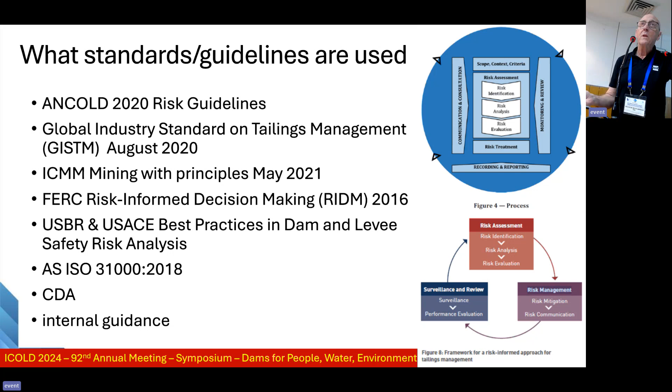And I said to a couple of guys recently, do you want to do a PhD? Do a PhD on piping of liquefied materials through cracks in a TSF. See if you can actually get it to work. Nobody's done that, as far as I'm aware, of the actual liquefied tailings.

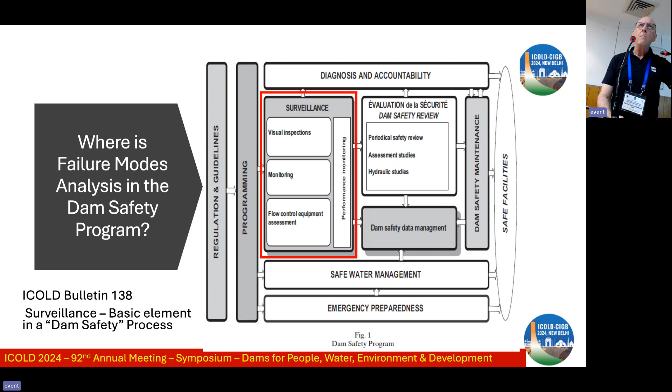So we've seen that figure there, which is basically the surveillance from Bulletin 138. Where do we fit in? Well, you can see it there with surveillance. Obviously, you've got your monitoring and your visual inspections, which we've talked about. I'm not going to go through that. So really, according to B138, it's the cornerstone. Maybe it was Kaya said that. It's really important in terms of the monitoring with instruments, which is what we're going to be talking about.

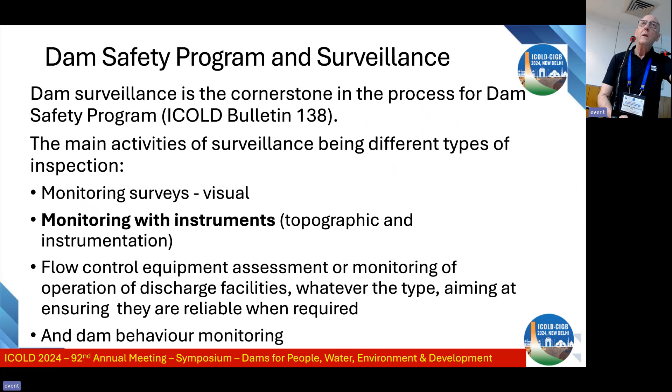But as Kaya said, visual and Manuel as well, visual is super critical. Don't ever forget visual as being a tool, as being an actual piece of equipment. Your eyes are better than many equipment. So why monitor? Kaya said that we can potentially cite failure modes, damage, changes, and design intent.

I'm going to go through a bit of philosophical mumbo jumbo now, okay? So be careful now. When we talk about inductive and deductive reasoning, who understands that? Can you put your hands up if you understand that? Who understands deductive and inductive reasoning? Thank you. I'm in the same boat.

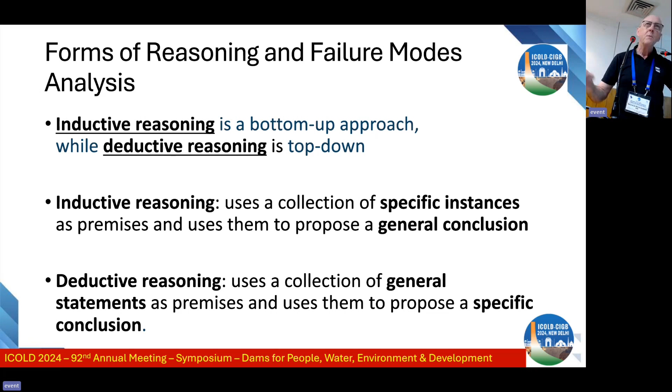So inductive reasoning uses a whole bunch of specific instances and uses them to get a general conclusion. Whereas deductive, Sherlock Holmes was a deductive. He deduced things, right? As a man who would try and find out who committed a crime. But it takes general statements and premises and uses them to propose a specific conclusion. If you don't understand that, don't worry.

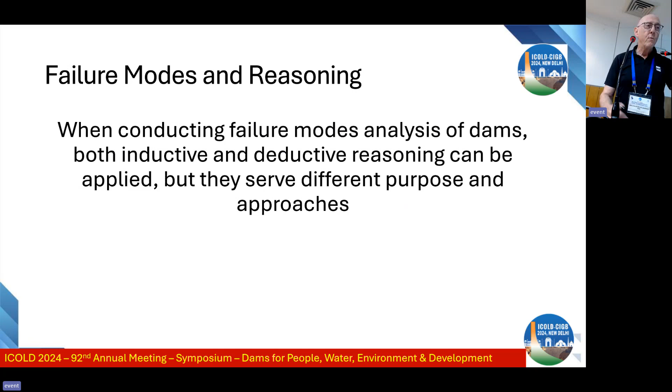So when we conduct a failure modes analysis, we can use both inductive and deductive reasoning. You probably do it without realizing what you're doing, by the way. So this is deductive. You start with general principles.

You apply to specific cases. For example, there's a general principle: structural weakness can lead to dam failure. That's a principle, right? So a specific case, you're inspecting a dam for known structural weaknesses and you find cracks, material degradation. Your conclusion: if these weaknesses are found, they are identified as potential failure modes. You've deduced this is a problem, therefore something's going to happen, right?

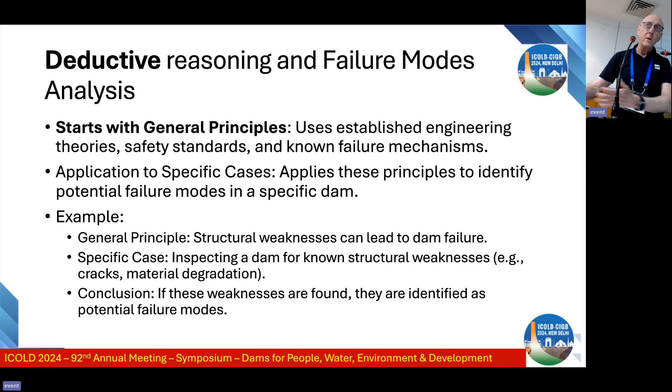That's what you've deduced. So in the failure modes analysis, you start with the unwanted event down here and you move upwards to lead to uncontrolled release of the tailings storage facilities. You'll see some diagrams coming up shortly, but you've obviously got to understand the dam components, their functions. Function is a critical part of the FMEA, both the system and the subsystem.

So in other words, what is the function of a sand filter? Somebody tell me, what's the function of a sand filter? Anybody? It's for piping. What is it? It's actually for seepage control and for piping control, right? That's the functions of a filter in a dam. So you have to understand the function so you can define a failure mode. How does that fail in what it's supposed to do? And what does that mean in terms of the end result, right? And they're obviously complex. The more detailed your system is, the more complex things become.

Inductive reasoning, which is what most people here probably do. Who does event tree analysis here? Anybody? When you're working out this happens, and this happens, and this happens, and off you go. That's inductive reasoning, right? You're actually starting with a specific observation. I've got an earthquake. I've got a flood. I've got a wind, something. What happens next? So you've gathered that data and understanding from a whole lot of examples, and you can start to reason what's going to happen next. That's what inductive reasoning is.

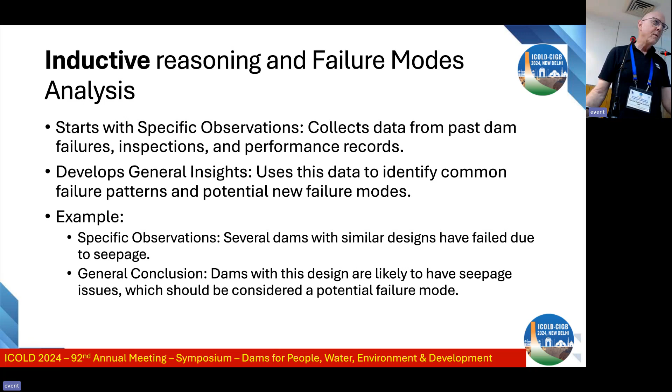So PFMA, now this is where there's an argument between the Canadian Dam Association, ICOLD, and the rest of the world, basically. They don't think that PFMA is that good, whereas the method that's in ICOLD and in CDA that's being pushed forward now is the way to go. And they are very good, I must say that, all right? And they have different purposes. But the inductive method relies on group brainstorming, and Andy called it brain sailing when he presented this. Part of this has come from his presentations to CDA.

And it starts with a hazard, your initiating event, ending in the unwanted event, a failure. So what might happen if a dam experiences a large earthquake, which is a hazard, for example? What happens next? And you brainstorm that. And I know when we were doing the Oroville Dam incident, not dam failure, incident, they spent a huge amount of time working on failure modes. That was seriously 2 weeks or something, with David Bowles and other brainiacs in there.

And I thought, man, my brain would be fried if I went for 2 weeks. 1 day is enough. Thank you very much.

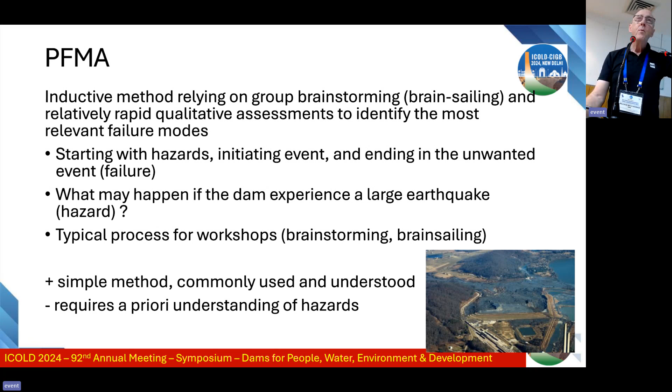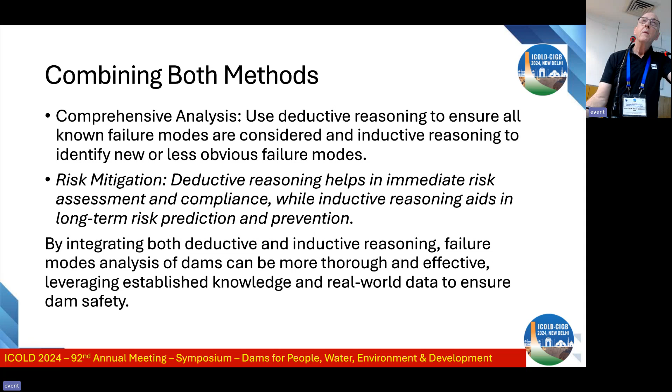Right. But it's a serious amount of brainstorming. It's simple. It's commonly used. You need prior understanding of the hazards to understand what's going on. But you can combine both, so a comprehensive analysis using deductive and inductive reasoning. So while there's this conflict between different parties, there's no reason why they can't both be used. They are very useful in different ways. Winston Churchill said, true genius resides in the capacity for evaluation of uncertain, hazardous, and conflicting information, which is what we're trying to do.

So here's some failure mode definitions from ICOLD and CDA. There is a subtle difference in CDA. A failure mode is the state or condition or loss of function or deviation from intended state, whereas the other ones say a way a failure can occur.

So it's how does this thing occur? Whereas the other one's a functional thing, CDA, which is not quite the same as ANCOLD. And ICOLD is similar in the tailings dam safety. So it does say that a term failure means loss of function, ability for it to actually perform properly.

So when you're doing a failure modes analysis, you've got to look at all of your stuff in your dam and think, what's the function of this thing and how will that function fail? If it fails, what happens next? You get me? So here's the CDA approach, and BC Hydro, by the way. They have only two failure modes. Dam fails by overtopping. Dam fails through loss of strength. That's what they call a top event. This is overarching everything, right?

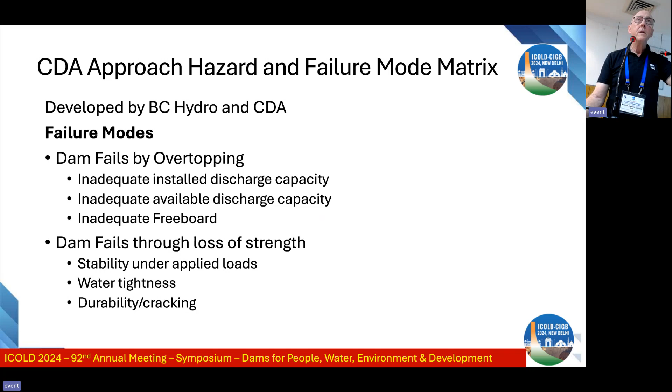But then the dam fails by overtopping. It's because they haven't got enough discharge capacity or available discharge capacity, installed or available, and inadequate freeboard. Then through loss of strength, there's stability, water tightness, and durability cracking. That is it. It's very simple, but we'll get into more detail on that one there.

So this is an important definition on the bottom there. The failure mechanism, the process that manifests itself in an undesirable outcome. So you start with the initiator and you end with system failure, the top level system failure. And I'll show you what that looks like.

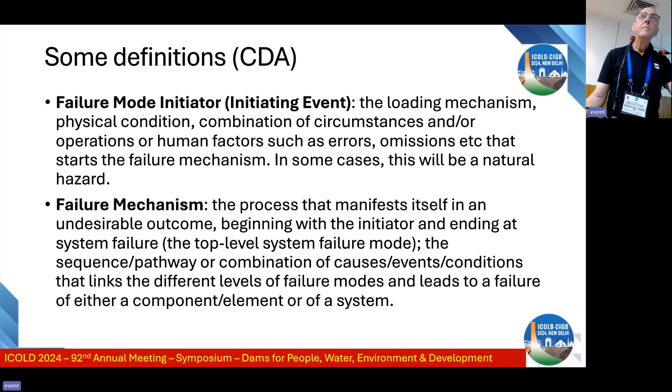So in the FMA methodology, you describe your system really clearly, you understand the function of everything in your system. The system might be a dam or dams or spillway or outlet works or whatever it is. You've got to be able to define that clearly so you can actually work out what the functions and the failures might be. They say create a block diagram. I prefer a functional diagram. What's the function of this thing?

I mean, typically you guys would probably draw, here's my dam, here's my outlet works, here's my filters, here's all this stuff. That's a diagram of the dam, right? So then what's the function of each one of those things inside the dam is useful. And you list them and their functions, you identify the failure modes, the manner in which a component could fail.

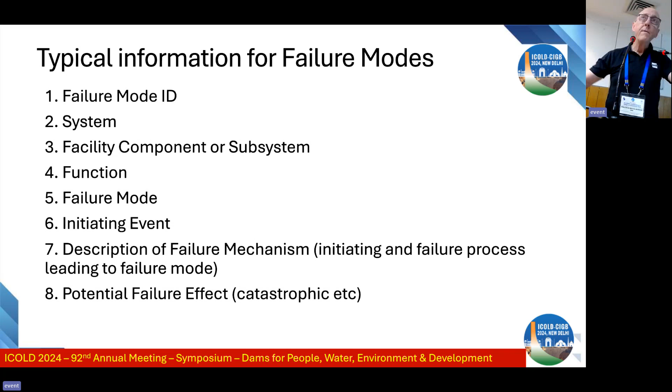And they've developed what's called the HFMM, which is, we'll come to, hazard failure matrix. And it assists you and describes the effects, and then the likely causes, and you get your actions from that. That is actually very similar to the inductive reasoning, which we normally do with event trees. So this is what information you need to get. Failure mode ID, what's the system, what's the component, the function, the failure mode, initiating event, describe the failure mechanism, and then what's the failure effect, is it catastrophic.

So this is the typical failure mode mechanism example. If you look on the left-hand side there, you'll see you've got an initiating event. I think it's a spanner dropping on a gauge which fails, and then it leads into the next failure mode, next failure mode, next failure mode, and eventually you get downstream flooding when the earth dam overtops because something's failed and caused a whole lot of things.

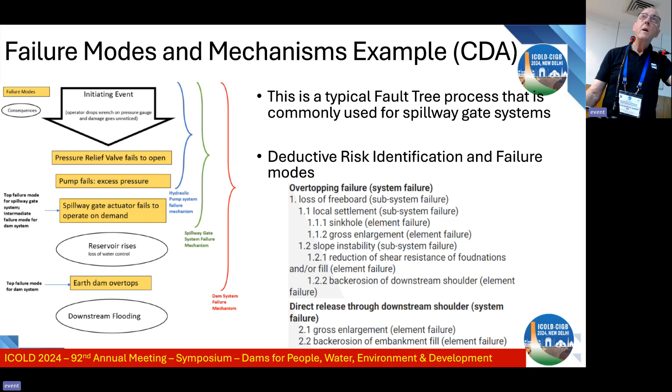You know the Swiss cheese theory that you've got to have everything lining up before everything goes bad? Well, it's kind of like this, where you say, the pressure relief doesn't work, pump fails, nobody fixes it up, the spillway doesn't work, reservoir rises, and the dam overtops. Bang, bang, bang, going from the bottom up. And there's a deductive reasoning risk on the right-hand side there.

That is a picture. So if you look at this diagram, you see at the bottom there, you've got progressive saturation, increased pore pressure, loss of foundation shear resistance, loss of shear resistance. So it could be an OR. This is a fault tree, by the way, as opposed to an event tree. Everybody's used to these events happening and going everywhere. This is a fault tree.

So you move from the bottom up. All these things down here would be things that are not good. Then you work your way up as to what that means. And then you get slope instability, overtopping, loss of freeboard, and dam failure. That's a top event. And all of these things down here lead to that. Right? Does that make sense? Okay, simple, isn't it?

Not really. When you do this, you must be careful. I've worked with fault tree analysis, and you've got to have a clear description. What is this top event here? That defines everything that happens underneath here. So you start from there and you move downwards.

Overtopping by loss of freeboard. How does that happen? Oh, I've got local settlement or I've got slope instability. How does local settlement occur? Oh, I have a sinkhole or I have gross enlargement. You would need to then say, well, how does a sinkhole happen? Oh, I go down here. You know what I mean? You're progressing downward until you come to the bottom down there where you say that is what's called an event. That's an initiating event that moves upwards to your failure, right?

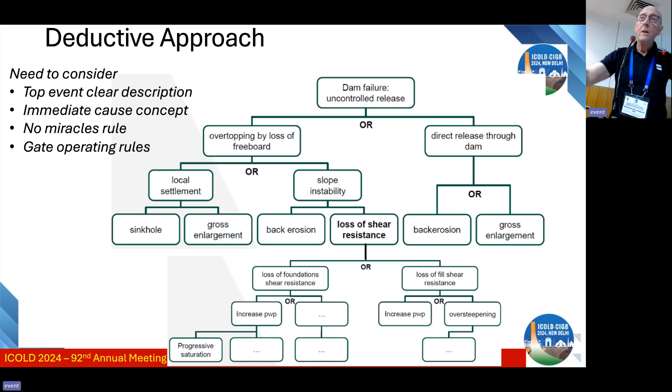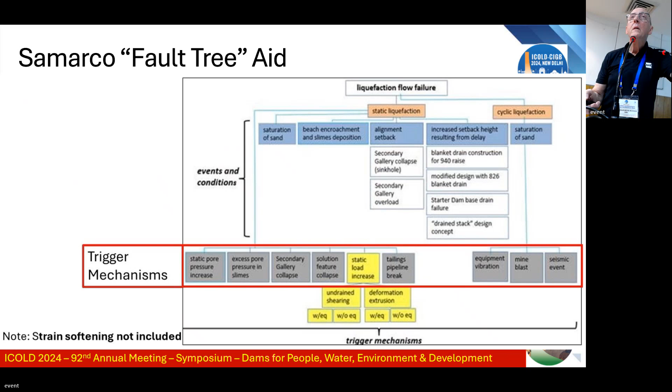So functional diagrams, I think, are really useful, and it clearly shows your components. Here's one, for example. You can see that's your dam. You can see how they've actually said, for example, that is a drop inlet spillway there. And what is its function? For flood release, right? With air supply to prevent negative pressures.

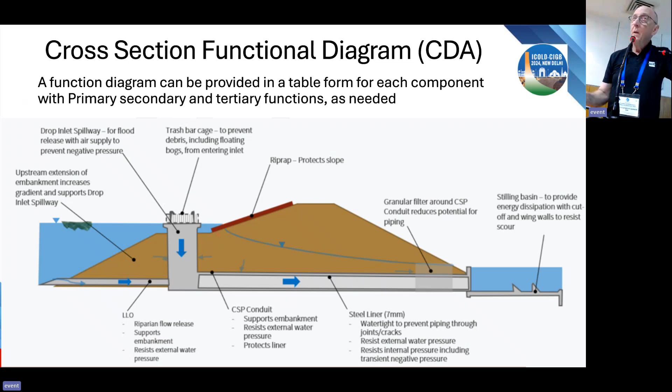Now, you could go deeper into that. You say, well, how's the air being supplied? Could that be at fault? If the air is not supplied, I get cavitation. If cavitation happens, then I get damage. If damage happens, I can fail the dam. Does that make sense? Going down, down, down, right? And this is just a tabulated thing for all those different components in the dam.

So functional diagrams, there's also elemental, functional, dynamic, operational, analytic. I'm not going through these. These are all in the Canadian Dam Association bulletin they produced. But some of the USBR say, and I think it's quite correct, if you cannot draw the failure mode, then it's not credible. How's that one, eh? Is that putting my neck on the block, right?

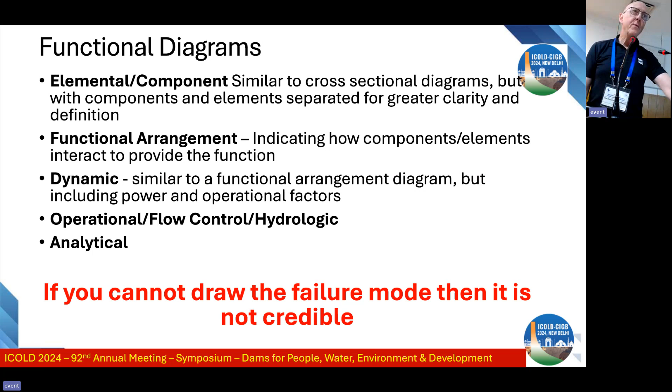If you cannot envisage and even draw this thing and say, this is going to happen, that's what's going to happen, then how is it going to happen? Is it not credible? FERC have their own guidelines for that too, but we'll come to that. And so does GISTM, which we'll come to just now. So that's an analytical functional diagram. Also, we do those as a matter of course. They're obvious, right? When you're trying to analyze your dam.

This is a functional information table where you have your failure mode, overtopping; a component, sluiceway; initiating event, earthquake. What's the failure mechanism that's happening to give you that failure mode for overtopping? To me, that's almost the same as what I would do with an event tree. The seismic event causes it. So you can see the failure mechanism clearly spelled out there. What gets back to there? So you're kind of going backwards there. Anyway, that's what they do as well.

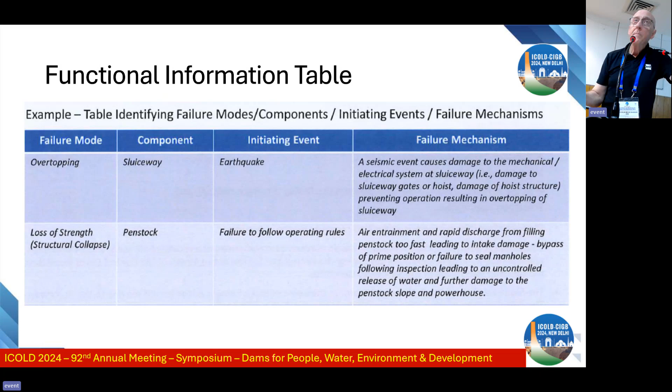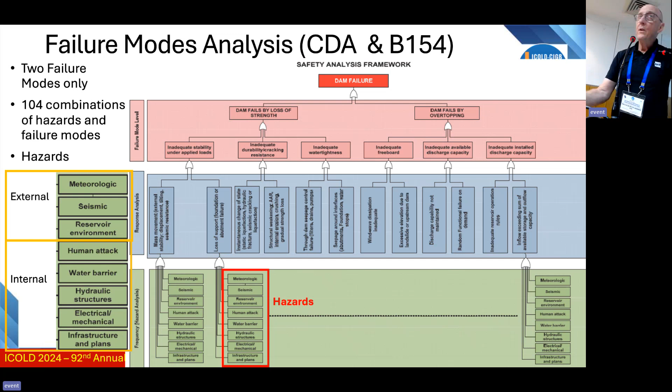But that is in the ICOLD bulletin 154 and the Canadian Dam Association. That is all a fault tree. See that there? The dam failure because of those two failure modes. Two failure modes only, 104 combinations of hazards and failure modes. Right? So you take that nice pretty picture and you convert it into a table like that. And you look at that table, you say, my goodness, that's a wonderful table.

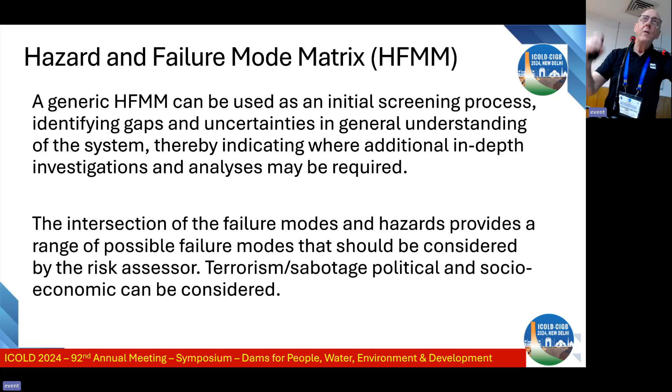But you have to go through every single one of those blocks in this approach to figure out which of these failure modes could happen. You can't read any of it, I know that, but that's okay. It's their generic hazard and failure mode matrix. It's a good matrix, but they say that's not the be all and end all. When you've done the failure modes evaluation with that, every time you got one of these, there's a question to answer. You see a little red thing up there in Excel, you have to answer the question. Is this applicable? Could this happen? And it's a good way of prompting you to think, gee, could it happen?

I don't know. Whereas when you're doing the inductive method, the PFMA, you don't have that table. You start from, this is what I've got in my dam, this is how it could fail, and you work through that way. So as a basis for asking questions, it's really good.

That's just a difference: on the right-hand side is the failure modes analysis approach the CDA is proposing. On the left-hand side is the PFMA approach, right? So you can see seepage through the varved clay layer, and you've got uncontrolled release over here. There's uncontrolled backward erosion there. Initiating event is seepage into a sand lens, and these are different failures of integrity. Very similar to that. So I do struggle to understand why the CDA gets so twitchy with the PFMA. But anyway,

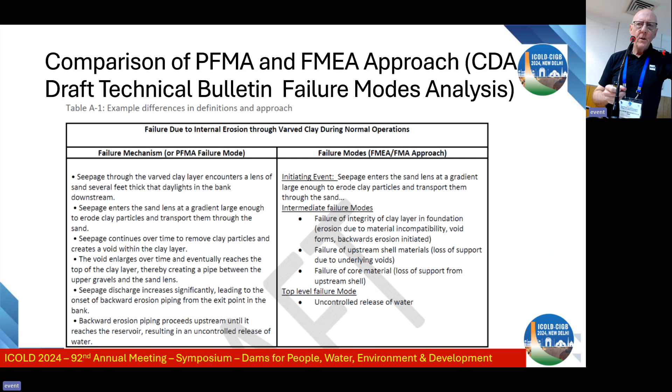that's what they say, that this is much better in terms of understanding. I really like the functional diagrams, the matrix, and even drawing up a fault tree type of approach. They can be very hard though at times. So Morgenstern in 2018 introduced the RPN, where he says you've got the likelihood, severity, and detection. Can you detect this thing? To come up with a risk priority number. And you use that when you're implementing mitigation measures.

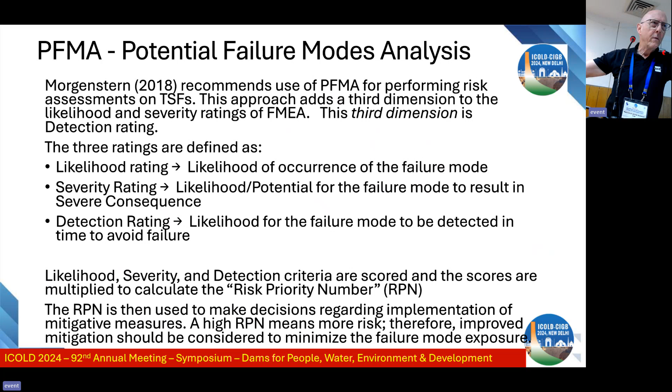Then we come to FMEA, and it's an inductive method. We clearly say inductive, right? Particular faults are postulated, and the analysis reveals the full range of effects. What happened next, right? And it can be extended to FMECA, which is a criticality analysis similar to the RPN, but not quite the same.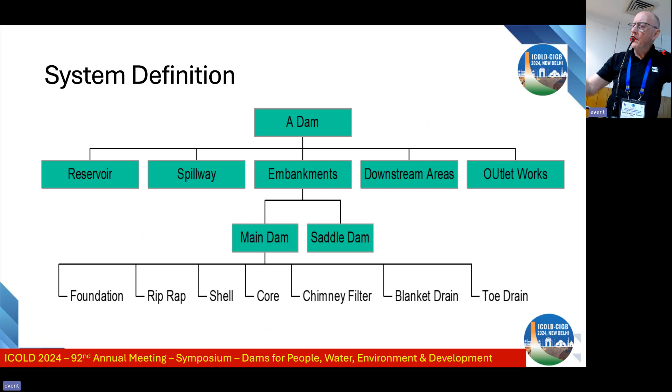And then, given the component number, what's its primary and other functions? We clearly say in ANCOLD, you need to define what is its primary and other functions, and then you can identify your failure modes associated with those things not working properly. And you look at your local and end effect, and can you detect it? And that's important. Can you detect it? Can you mitigate it? And what are the consequences?

And detection is really critical from the point of view of your TARP. Right? If you can't detect it, you have no chance of warning people downstream. But you need to have ways of detecting different failure modes. So what is the best way of actually detecting that this thing is going to happen? And what can you do about it?

That is a typical initiating event spreadsheet that we use. We got all of these events down here. Some of them are crazy. For example, ice in Australia.

Are you kidding me? No, we do have ice, but not much, you know. Norway, you've got lots of ice, I'm sure. But in India, I don't think you've got much ice here either. But anyway, so north, yeah, of course you would. There are lots up there, nice and cool.

Okay. So, and there are things like termites. Termites are a hazard in your dam. I've seen a termite failure of a dam starting, and my boss put his finger in the hole to stop it. Right? He literally put his hand on top to try and stop this piping occurring. Right? So there are a lot of hazards you can have there, initiating events.

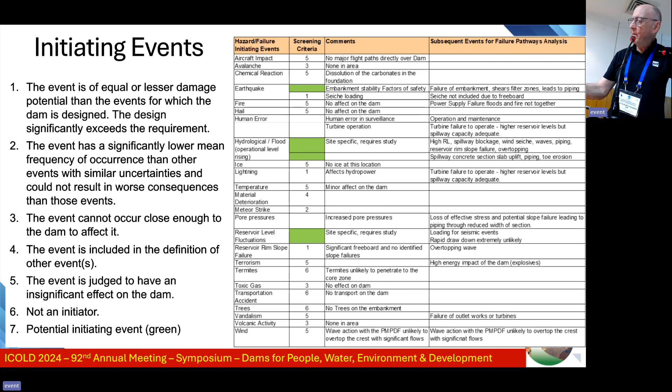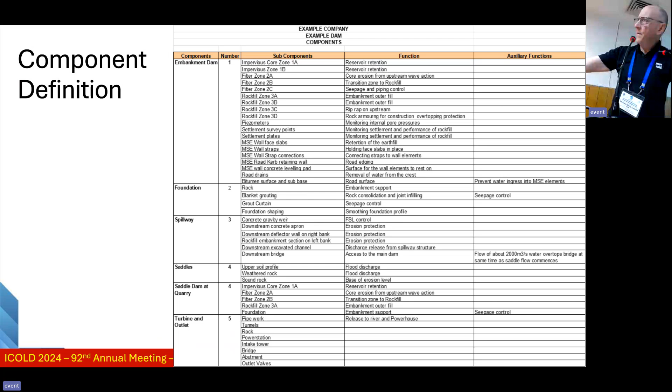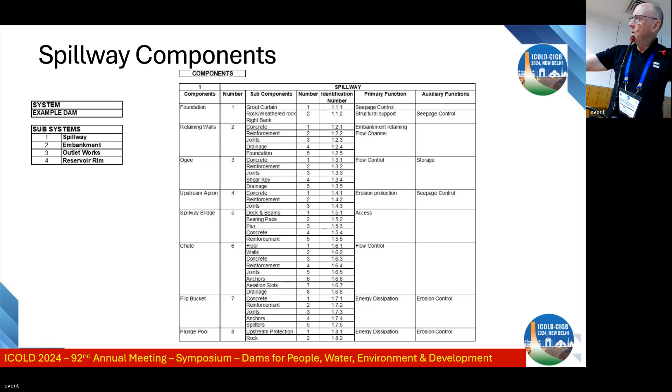Then the next part is your components. You can see there are a whole bunch of components in a dam. Right, there they are. There's the function, and there would be an auxiliary function over here if there are other functions. So component definition is really critical. Then that's the spillway components, for example, and you can see there are a few with auxiliary functions as well. And then you come to the typical failure modes analysis, and I'm going to flip over this one because there's a much better one with the USBR and Army Corps of Engineers definition of failure modes. So here we go.

They clearly say you've got to describe your failure mode properly. For example, if you say piping from the embankment into the foundation, that's a failure mode, right? I mean, smiling at me thinking, oh, dummy, of course, yeah. But that's a simple definition, isn't it? What else do you need? Well, you need to know exactly how that failure mode is actually going to occur, which is why you've got this super long definition or discussion over here as to how that failure mode will occur.

And when you do your exercise, you better be sure that you can describe how your failure modes are going to occur so that you can monitor them or you can control them somehow, right? If I know that I've got a failure mode that's going to be from piping or whatever it might be, it's going to get bigger and bigger, can I monitor that? Piping is a bit of a pain, actually, because it's not easy to monitor piping.

I had an incident on a dam, and I'll show you just now. The pore pressure on a piezometer just went up, stopped, went up, stopped, went up, until I blew the whistle. I said, something's happening. And we found a hole in the dam. Water was squirting in there and pressurizing 200 meters away. Right? And eventually we found the hole, we fixed it. But the piezometer was telling me what was going on. I thought, wow, that's amazing. I've never seen that before like that. It was just so good. Actually, terrible, but that was good, you know.

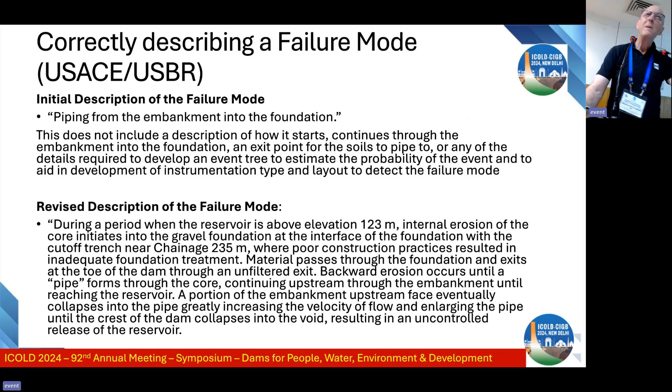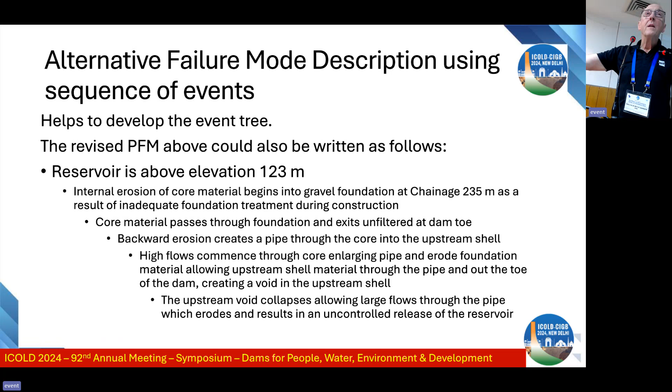That's another way of actually describing that same event there, down the bottom there, with an event tree process, right? Just showing how it can occur, which is much easier to equate or understand, basically, as far as I go.

Can you clearly be sure I don't have to monitor that failure mode? Maybe. That's your decision, right? You're the engineer. You've got to figure out, can I not monitor this failure mode?

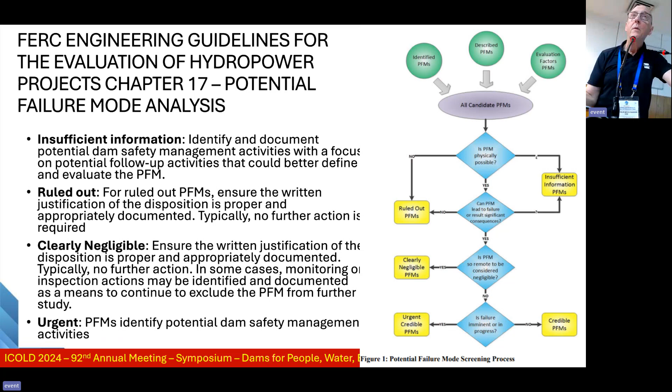So then you've got this whole thing of credible failure modes. Are they technically feasible? I do like this, actually, in a way. It's kind of an interesting definition. I thought, yeah, crazy, man, you've got to have everything credible. But no, technically feasible failure mechanisms. That's the kind of thing, can you draw this thing, right? That's the way I look at it.

And then the materials present in the foundation, the properties of the materials, the configuration of the structure, the drainage conditions. You're taking account of all those things when you're evaluating the technical feasibility. In other words, if I haven't got liquefiable material, then liquefaction is not an issue, right? It's disappeared. So that's why you change the dam design from an upstream raise to a downstream raise. Simple, problem gone. Eliminate the risk. I don't have to monitor that anymore.

I still have to monitor the dam zone. But they do result in different failure scenarios. So you have piping or flood overtopping or seismic liquefaction. So credible failure modes do vary with time. You know that. So we just need to be aware of that and be sure that we have...

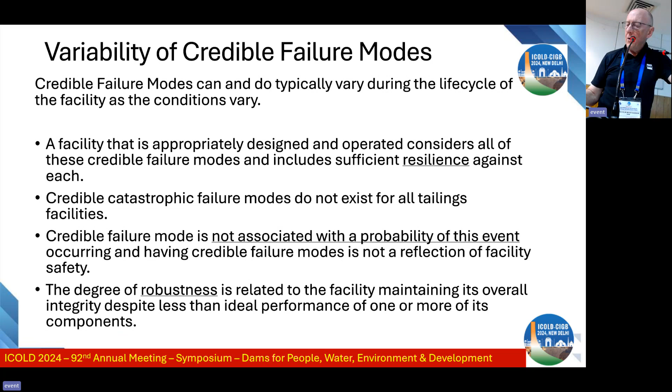And there's two words they use here which are really important. One is robust, and another one is not there anymore. It was there. Resilient. So they need to be resilient and robust. Resilient, it can handle changes, and robust as well. There's a definition of those, but that's what they have got.

And then you've got ICOLD. These are in the ICOLD bulletin.

How much time have we got? About 5 minutes? Yep. Okay. Well, I got actually zero.

That's all right. Okay. I'm not going to go through these in detail, but this is directly out of ICOLD, out of Bulletin 194. All I've done is I've gone through and said, right, these are instability due to foundation failure. You can see all of the reasons why you might have instability in the foundation, right? There's pore pressure generation, artesian pore pressure, liquefaction, incorrect seismic hazard, erosion of the toe, or even excavation of the toe. We've had that before, haven't we, Edgar? Or there's undetected weak materials. Those are all reasons why it might happen, right?

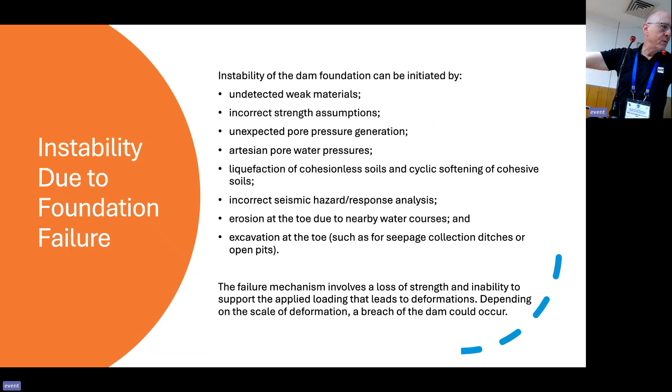So what are you going to do about it for your monitoring? Or there could be instability of the dam slope. So all of those reasons might be there as to why that can happen. And then the next one, that's how you can monitor it. For example, if you put piezometers in, you can monitor for seepage or blowout or heave, where you're seeing the change of pressure.

Where do you put them? In the foundation, downstream, below the lower permeability layers. Those are the kind of things you've got to think about when you're looking at the failure modes. What method is there to actually monitor it, and where do you put it? We know that, right? That's what your exercise is going to be about. But first, you've got to define the failure modes.

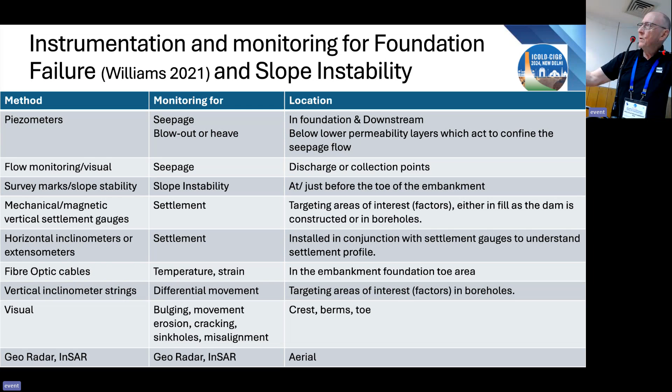What about overtopping? We talked about freeboard. There's your freeboard up there, a little bit of freeboard. When your flood comes up and you've got to your maximum flood level, the spillway there, you've got a bit of dry freeboard there, and then it starts to overtop. And your tailings are deposited nicely on the upstream face there. But can it be initiated by a whole bunch of things? Yes. Large floods, wind, waves, sabotage.

We haven't talked about sabotage or vandalism or terrorism. It could happen, right? How do you put an annual probability there? I have no idea. But you still can put it down and say, the political climate's really bad. What do I need to do about this in my dams, wherever they might be? They're not soft targets. It's hard to destroy a dam, very hard.

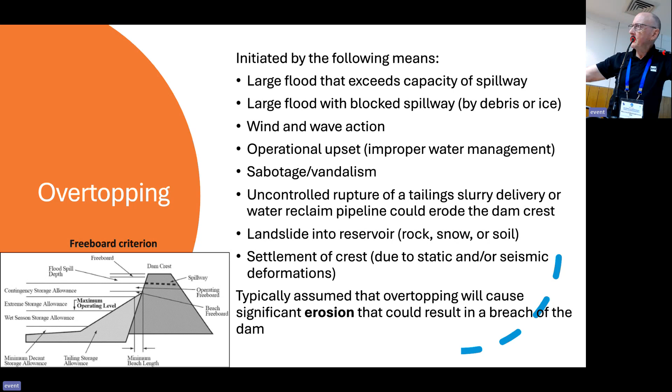So what about overtopping? How can you instrument overtopping? You can check where your decant pond is. You can check the status of leak detection systems. Secondary containment. What about automatic flow measurement and fault alarms on the pumping pipeline? All those things you can monitor to make sure that everything's going all right. If they're not working, suddenly the water level goes up and you're in trouble. That's just a pretty chart showing erosion classification for different depths and that sort of thing.

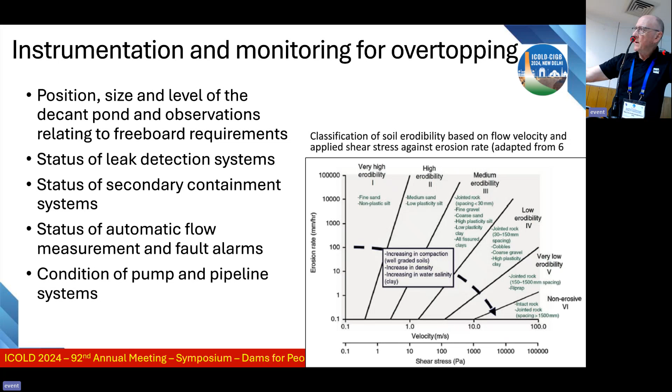And in piping, as I said, the only time you really get piping in tailings facilities, as far as I'm concerned, is when the water level goes above the tailings level, and you've got that water against the embankment as opposed to tailings. So how can you monitor it? You can look at trends, rainfall, linear increasing, sudden changes. That's the one I was talking about there.

You see my nice piezometer there, that orange thing? Going up nicely. I thought, oh, good, it's going to, no, it didn't, it went up. And now it's going to be fine, isn't it? No, it didn't, it went up again. Oh, now it's going to be fine. I triggered it there. I said, that's it. I've had enough of this. I need to figure out what's going on. And I found out the problem.

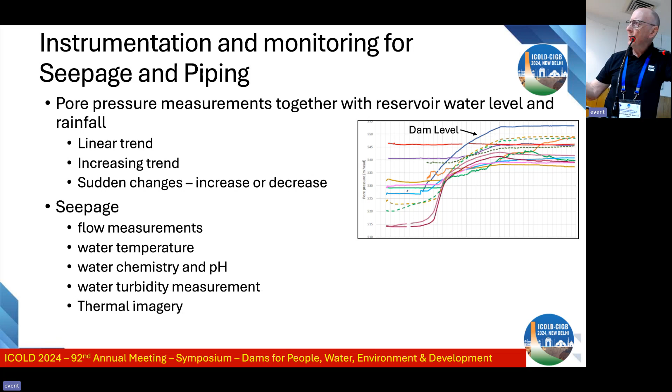So what about seepage? Your chemistry, we're talking about dirty water stuff. So what about measuring that in terms of, is it increasing? Are they changing? Do I have clear water now? I've got dirty water. What's going on in terms of the actual water that's coming out? And I guess visual. Remember I said visual is important. So where is it green or not green? Where is it dead or not dead? Seepage will kill as well as give life, right? Depending on what the chemicals are in the water.

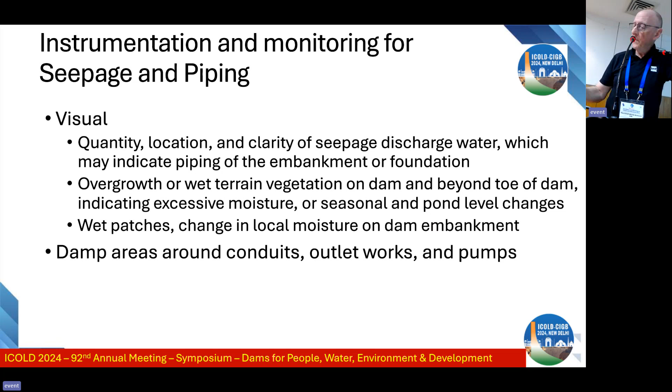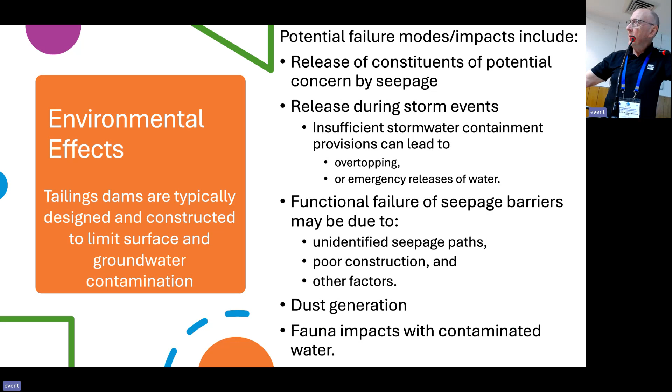And environmental effects. We talked a little bit about it, what you're releasing into the environment during storms or seepage barriers. So your seepage barrier is the cut-off trench, for example, or the foundation grouting or something to stop the seepage. And if that fails, well, off you go. Can you monitor that? Yes, of course you can. And there's your instruments, again, visual and seepage monitoring.

And that is not the end. Somewhere. This thing died, by the way. It's just dead. That's done with that. That's it. Thank you. Oh, no questions, huh? Oh, come back.

Well, I think we have got a bit of time later on the end for our exercise, but we haven't actually got the sheets for the exercise yet. So I think we've probably got a few more minutes. We could take up a couple of questions for Malcolm. So anyone got any questions for Malcolm? One? No, I'm not answering that one.

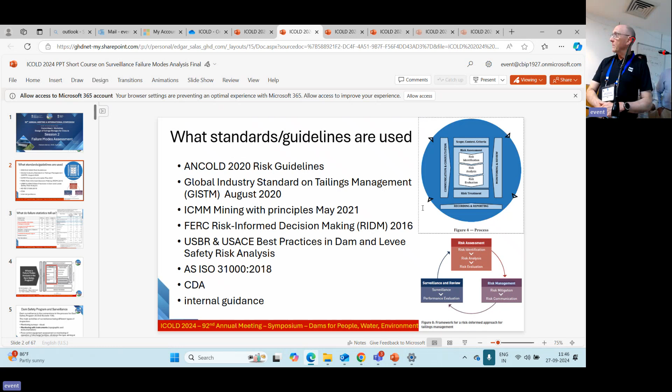When we assess probabilities, we always use historical data to kind of benchmark and see where we are. But then with both fault trees and event trees, we can really account for the human error and break it down and then use expert judgment. So you can always analyze, is there proper training within this organization? How is the governance? So do we have procedures? Do we have a good regulation backing up the operations in this area, in this country, and for this dam owner? Do we have all the procedures?

Do we have the O&M, operation and maintenance manuals? Do we have the emergency action plans? So all of that really informs how we assess the human error. And we should go for it. And that's included when we reduce risk as low as reasonably practicable. That's the GISTM term, right? And in dams, which has been around before GISTM came along, we have to include that sort of thing. Is my operational maintenance deficient in that area? I need to fix it. It's a small thing, but I need to fix it, whatever it might be.

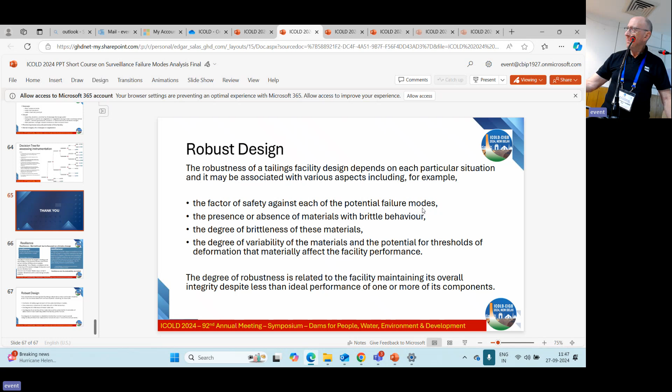Yeah, exactly. It's easier said than done. You agree? And we are humans. We cannot predict each and every error that can happen in the next 10 years. Sure. It can be something as fine as the operation hiring somebody who maybe is younger, and there's pressure from the management, and that person makes the wrong decision. We can't predict that.

Or, sure, we look back at Oroville. I mean, Oroville had all the expertise in the world, had all the money in the world, had amazing engineering, and one little thing slipped off, right? So even in a very robust organization, you can still have these things. So yeah, no, I don't disagree with you. It's just easier said than done, and it's still something we work on.

And my point is, independent reviews, dam safety reviews, review boards, etc., are the ones that are having multiple layers of independent perspective and opinion on what's happening. That could help mitigate some of the issues. And I think going along with that, I didn't put a slide in here, but one of the biggest issues with all of these techniques is biases.

Everybody has a bias. I think cheese is green, you think it's orange. Well, I don't care what color it is, it's cheese. And everybody has, well, I'm better than you. And come on, who's better than who? I mean, really, we've got to be so careful of professional biases when we do these things.

Somebody will stand up and he's the bee's knees, he knows everything, and everybody else just says, oh yeah, okay, fine. And meanwhile, this person over here who knows very little might say, but hang on. So you really got to be careful of biases when you're doing all of this stuff. It's dangerous to not. And I've just brought that back up again because when you deal with these things at the bottom, you try and figure out what's the controlling one.

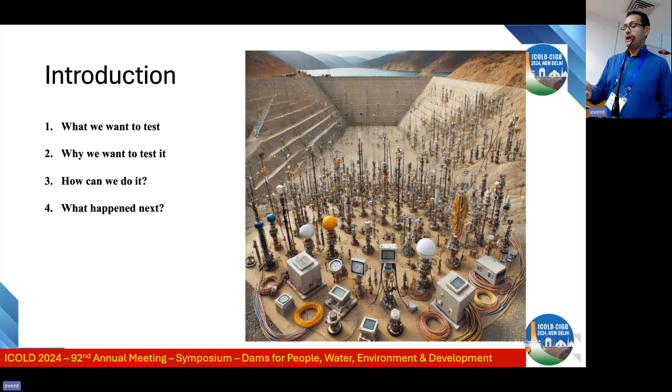This is going through different dams and different components, trying to answer the question of what we want to test. This is a typical or traditional downstream dam. We see the components: a core, typically an impermeable clay core, a cutoff trench just to stop the water going through. We have the foundation materials, tailings, and a shell that could be rock fill or general fill. We have some filters to deal with a failure mode because one of the components could fail, and a drain, how we're going to collect the water and how much water we're going to get through seepage.

Then we have variations in tailings dams. We have a centerline, with similar components, but in some of these configurations the tailings might be more critical. The foundation might be more critical. The rock fill might be more critical. The filters might be more critical. And that is part of the journey of working out what is critical based on your failure mode.

Then we have a traditional upstream construction. You can infer from here, hold on a second, this is sitting on tailings. Then are the tailings the critical element to test here? Is it the rock fill? Is it the phreatic level? Is it the water inside?

Then we go with a traditional downstream construction. And it might be that in this one, well, I don't really care about the tailings. Then the tailings are not that critical in my case. The foundation might be, the rock fill might be. Then just basically trying to answer that question: what is it we want to test? And typically the answer is what is important to you to test.

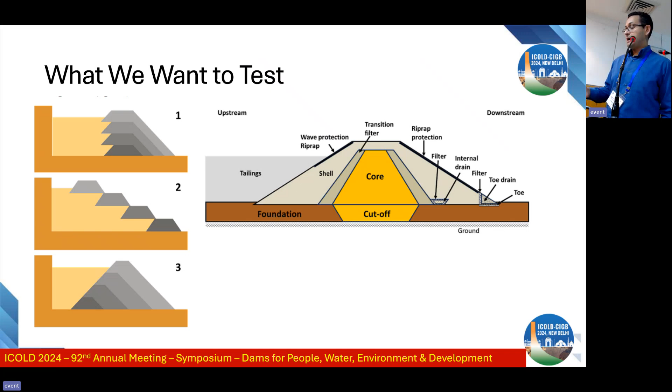Then the tailings, if we have a configuration like this, can the tailings liquefy? I have all my dam basically sitting now on tailings that potentially could liquefy. Are the tailings gonna go and disappear under a seismic event or start liquefaction? Or are they gonna actually deform nicely and happily over the next 30 years? That is, in my short summary, what you need to understand: what you want to test and why. Then I'm gonna start with something quite simple, but to me it is the key of everything that we do.

A tailings dam is a beast. I see it as a beast and it's alive. And when I say it's alive, this in here changes as you build the dam, as you add more weight to the dam, you add more water, you remove the water, that will change how this material looks on the inside. And this is exactly the same for the foundation, for the rock fill, for the tailings, for the filters; pretty much every single component follows these three rules.

If you add weight, the water is going to try to get out, the voids will disappear, then you have a material that potentially is more dense. If you're making that material more dense, are you making that material now brittle? Are you making that material problematic? In the opposite, if you remove weight, the material becomes looser; then are you creating a problem?

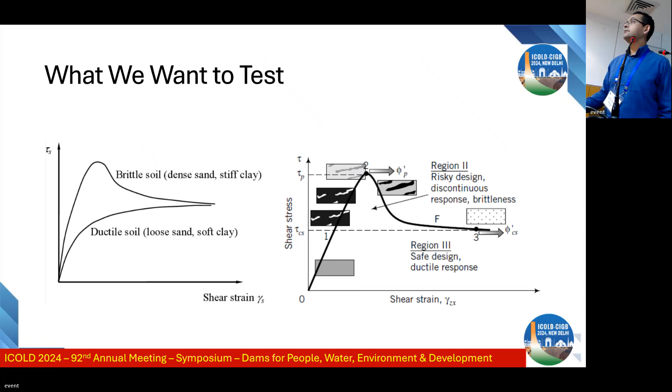Then why do we want to test it? I'm just going to go through simple points here. We want to design; we want to understand what we're going to design against or for. During construction, we want to predict how the material will behave. Operations is pretty much another phase of construction, but it's how the dam will behave as I'm operating it. And closure is how the facility is going to perform over the years after we close it.

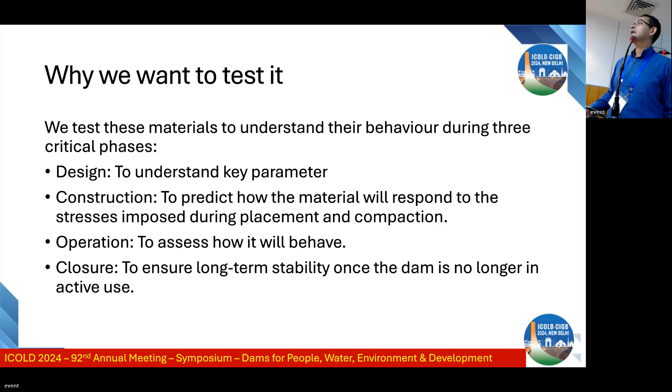Now, how we do it: basically we have two simple methods, and most of the time we have to use them in combination. We have in situ testing, where typically you go there, drill, take samples, and do in situ tests: CPTs, SPTs, shear vane. The other one is to go there, collect the sample the best that you can, and test it in the lab.

The problem with the first one is that we don't really understand what is going on in the ground, so we rely on correlations. We rely on: if we put a bar in the ground and hammer it, how does that compare to another bar in the ground that was done 30 years ago by a person somewhere else, and yeah, it makes sense, it's the same thing.

Or if we go to the lab, we collect a really small sample and try to mimic the conditions in the ground, which, remember, we don't really know anyway. So we're trying to assume the worst case scenario. Typically you need both.

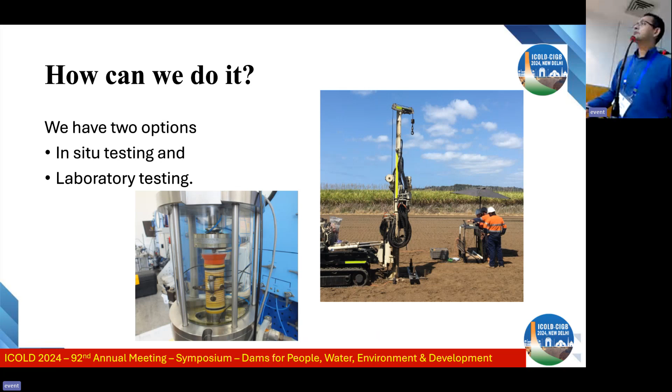I'm just going to go briefly through the most common ways to do it. In terms of in situ testing, we basically have SPTs. As I mentioned before, you go there, hammer the ground, count how many blows of the hammer you use, and basically try to work out a density.

Then, okay, my material is dense, is loose, and then you relate or try to link that density back to what I mentioned before: how many voids, how much water I might have, what sort of soil I have, and then you correlate that through those areas.

Now, something interesting about this testing, and I'm quite familiar with these scenarios. I don't know about in India, but in saprolites, really all residual soils, in Australia, New South Wales, we have that. You go there with this tool, start trying to hammer and get the rod down into the ground, and you can't, because the soil is that hard, because it's basically been going through leaching.

It's really hard, but guess what? The material is super brittle. Then it will break really fast, really quick. And you think that you are in really nice, hard soil, and you are not. Then that is where you need to complement that.

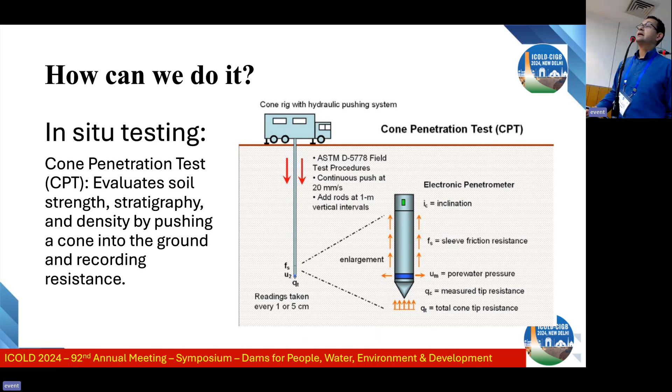Probably one of the most popular techniques in tailings dams is the CPT. It's quite similar to the other technique. This one goes as a bar, goes faster. It's slightly smaller. You measure the pore water pressure, and then you basically one more time use empirical correlations, trying to work out the soil conditions, the layering, where the phreatic level is, and so on, and the liquefaction potential as well.

Another simple or common tool is your shear vane, which is pretty much similar to the other techniques. You push it into the ground, you rotate this vane, and you're trying to basically correlate that to some sort of strength. Typically, you basically use this to determine undrained strength.

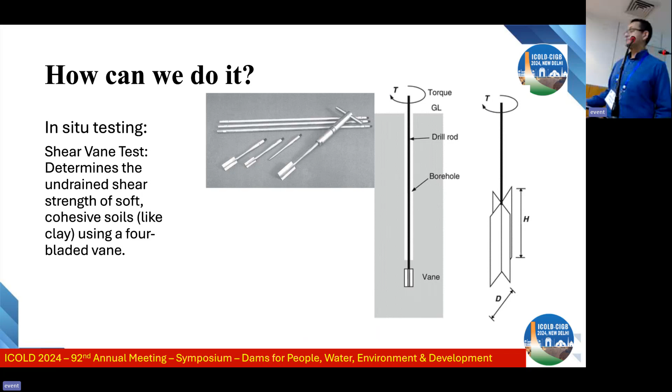You're trying to go either side, and then you can work out the permeability of that material and say, well, if I put all this weight and all this water, the permeability of that material is this much, and the water can go really fast through there, or it can go really slow, and then you basically put that in your design if it's critical.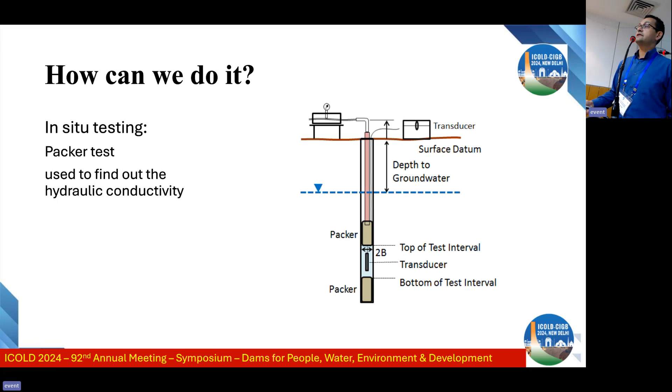The most common one of all of them is a triaxial test, where we're trying to mimic when we are loading the soil, or sometimes we pull the bars up, and this is the way we are basically pulling the soil, what we call extension. You can get drained values of the material. You can get consolidated undrained as well. Then you're trying to understand what happens when you load the materials, how they respond, how they compress, how the dry density will change.

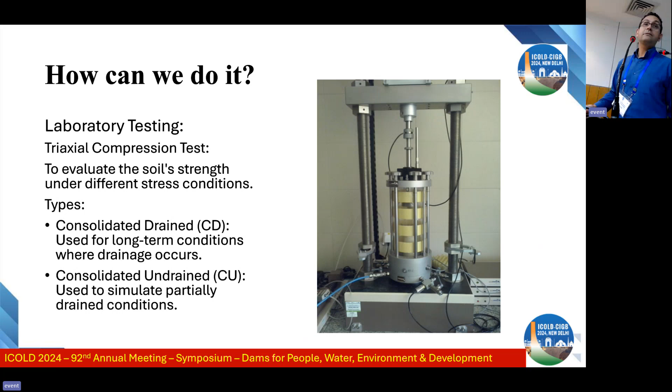The other one is not really as common, and this is just a variation of the other triaxial, and this is about cycling. You just go up and down, up and down, trying to mimic what an earthquake will do to the soil, how it will react. And there are some variations. These ones go up and down. We have other ones that go sideways, similar to the direct simple shear test.

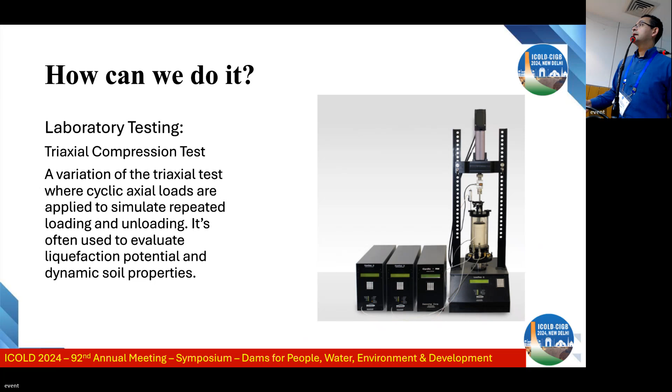Then what happens next? Now we went through, we collected all the samples. We determine, well, I want this material to look like this, and based on my lab results, I'm expecting to see the phreatic level stop here, go down, and disappear in the foundation. If that is the case, and I want to be sure that is the case, then during construction this is empty, so I might not put any instrument to look at that, but during operation I want an instrument there, because I want to be sure the permeability is what I assumed it would be. So during construction you put that instrument in here, because it's really important for your design to understand that permeability.

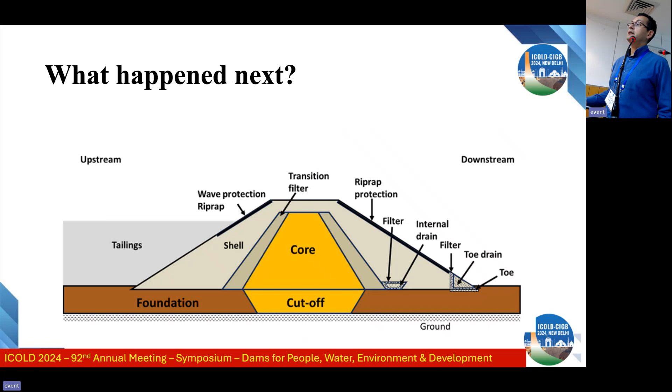Similar with your filters. Is my filter able to actually drain any water? If this failed and I'm wrong, if I want to know my filter is actually working, then you might introduce another one here. Similar with the piezometers. Then you start thinking, okay, how can I use this, and what am I going to use to design my instrumentation. The settlement: okay, I put the sample in a triaxial and I notice it settles this much. Then a similar thing should happen here, an oedometer test. That is basically how we need to link this.

Then you go to the design phase. You now understand the shear strength. You know what the material is going to look like. You know the permeability, and you know the compressibility of that material. That is the moment, at that design stage, when we add all the tools that we want to add. And the problem is, it's not common that we are able to go into a design phase.

Typically, we go to a dam that has been sitting there for years, where nobody has done the geotech, and nobody really understands the failure mode because the dam is quite old and you don't have the records. This is similar, it's still valid. You need to start looking for the right things. How you do that, back to what Malcolm was talking about, is your failure mode. You have an existing dam, you really want to understand what is critical, you do the testing and you work through that.

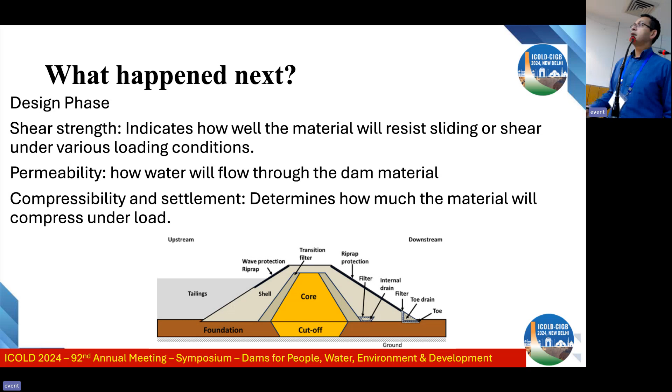During construction, some of the dams, it's more common probably in water dams, they fail typically when you start filling the dam. This also could happen in tailings. And as a way how you're building this, you want to understand what is critical for that construction phase. And even though the instrumentation that we use is the same, and what we are probably going to be looking or monitoring for is the same, because we're going to probably be looking for permeability in the clay core.

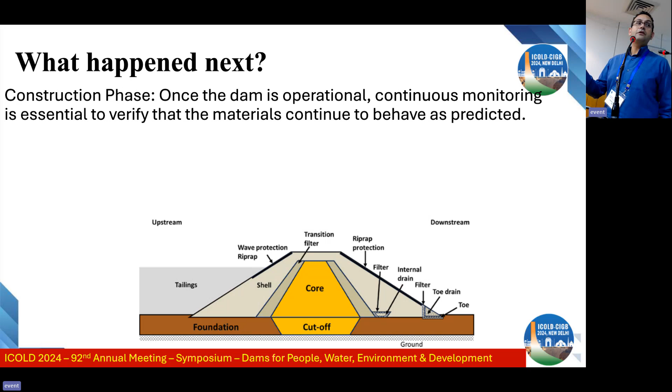Then one thing is permeability in the clay core during construction, during operations, during closure. Then it's a different value. And that is the reason why I say this is a beast that is alive, because it's always evolving. And it's evolving based on the way how you manage these dams.

During operation, it might be that you are looking more at what happened with the pressure, how I'm increasing the pressure because I'm putting all these tailings full of water in here, how the seepage is actually acting in here, ongoing consolidation, the material settling. Then what you are actually using is the same, but it depends on what part of the cycle you are. And that basically is the key.

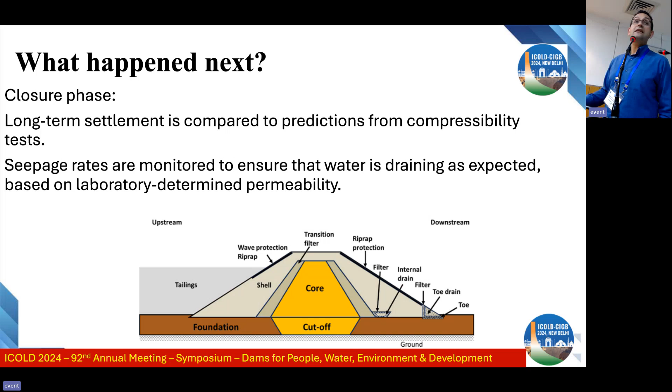Then we go for the final one, which is your closure. In closure, I'm expecting, well, the water will disappear, this will consolidate, everything's going to look nice and pretty. Then you need to be able to actually look at that as well. And by then you have different trigger levels, you have different criteria to assess. And basically that's it. I hope by trying to make it as simple as possible, just to make you think into how to use the data you collect in the field, and how you can use that to develop your failure modes and your monitoring.

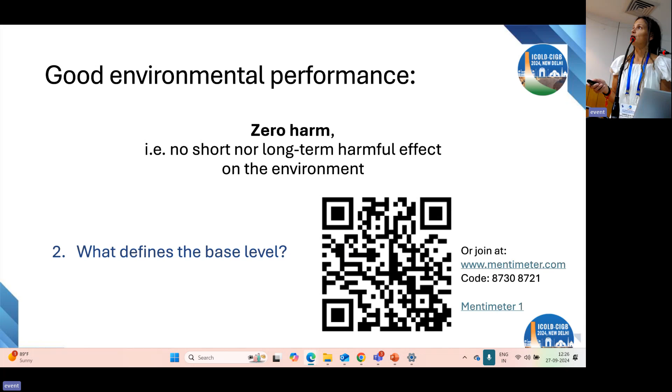So good environmental performance. My suggestion to define that is zero harm, that we have no short or long-term effects on the environment or harmful effects. And that brings a few questions. So that was a strange order. So I have these 4 questions. So if you use that QR code, or you can also log in on mentimeter.com with the code there.

I just need to get this. Do you get the question? So I need to activate it here. So it's activated? Yes. And now it would be very fancy if you could see on the screen whatever answers pop up, and that's my problem, because that I only have on my own computer. Yeah, I know. So when you receive the PDF versions of the presentations afterwards, I will include all the results. So I've got 4 words from 2 people. I hope to get some more words. It's allowed to write more than a word as well, but the shorter, the easier to see the result. I'm not so used to using this Mentimeter. I've been in the audience and not the organizer of this.

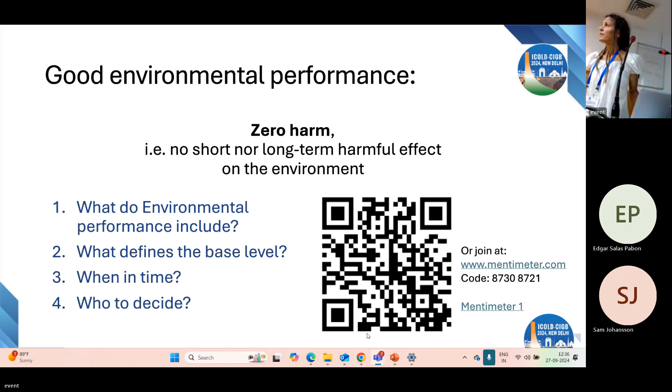I need to figure out how to get. Yeah. Annika, you want to share what you're looking at? Yeah, is that possible? Send you a meeting invite on Teams to your email address, and then you can just share your screen. Yeah, and I don't have so much time. I see David holds the whip. We're doing what's... I keep on in the meantime. Pass your computer around. And now I cannot change slide. Is that me doing something wrong? Maybe share a different screen. That's it. Okay, you should get the meeting invite now. I need to connect my computer. I'm connected on internet, but not to Teams. No, I haven't received the invitation.

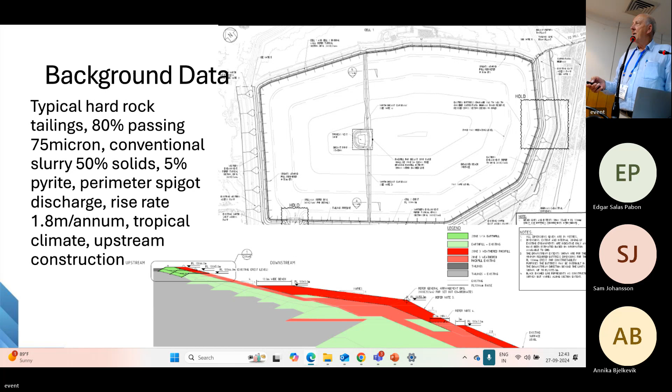And they've got upstream construction. And you can see from the cross section, there's been a starter dam, then upstream construction, and people have suddenly realised, oh, hang on, what's going on here? We might have a bit of a problem, and we have to build these buttresses. So there's some buttresses that have been constructed. And so it turns out the design, really the design case is the post-earthquake liquefaction.

So you've got different types of tailings there, starting with the historic ones that are pretty low strength, and then improving as they've gone up. But there's a slip circle there, pretty hard to see, but you can see it goes down into those deep tailings where it's more prone to liquefaction and much weaker. And you can see where the buttresses have been built to contain that slip circle. So that's the background. And the first question we're going to talk about today is failure mode assessment.

So let's turn the page over. Question one is credible failure modes. We want to try and come up with some credible failure modes. List them on the left-hand side. Also think about the method of detection or warning. What would we put in as a detection system and maybe a warning system, and then method of predicting is another column there too.

So if you could form into some groups, maybe we could do yours when we come back after lunch, might be better. Yeah. But then we can just have these groups talk amongst yourselves. We have some roving mentors, and lunch is scheduled for 1 o'clock, which is in 15 minutes. So we've only got 15, maybe 20 minutes to talk about this together, and then move down to have lunch. Is everybody happy with that? All right. So if you can form your groups and have a talk about it. And the roving mentors can see who is performing enthusiastically and note their name. Create a group of 5 or 6. I'm going to look after the group here. Thank you for volunteering. And maybe mix up, don't just sit with your colleagues, get into another group with different people.